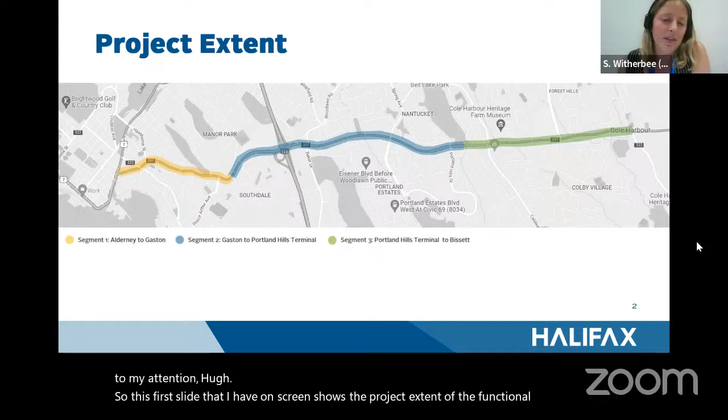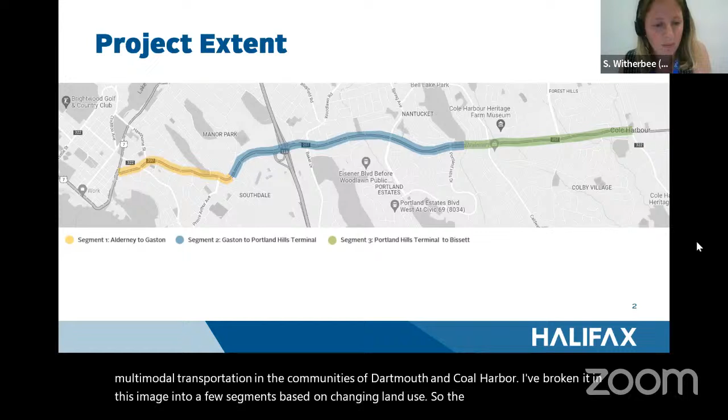This first slide shows the project extent of the functional planning project. The Portland Street corridor is 7 kilometers, spanning between Alderney and Prince Albert intersection all the way out to Bissett Road. It's a very long corridor, important for multimodal transportation in the communities of Dartmouth and Cole Harbour. I've broken it in this image into a few segments based on changing land use: segment 1 from Alderney to Gaston, the second from Gaston to Portland Hills Terminal, and the third from Portland Hills Terminal to Bissett.

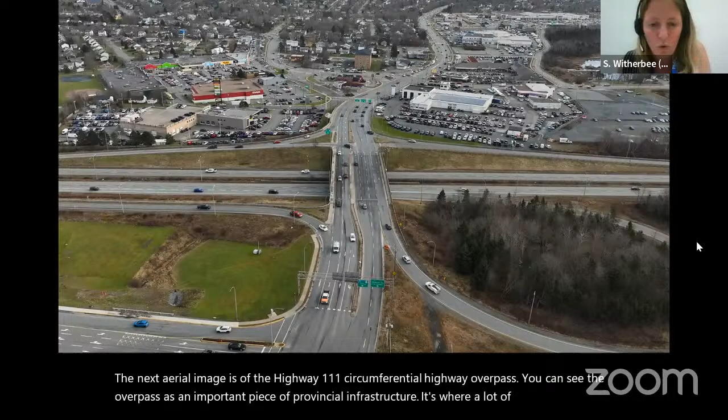The next aerial image is of the Highway 111, the circumferential highway overpass. You can see the overpass is an important piece of provincial infrastructure. It's where a lot of people who are moving along the corridor are using the corridor to access the highway.

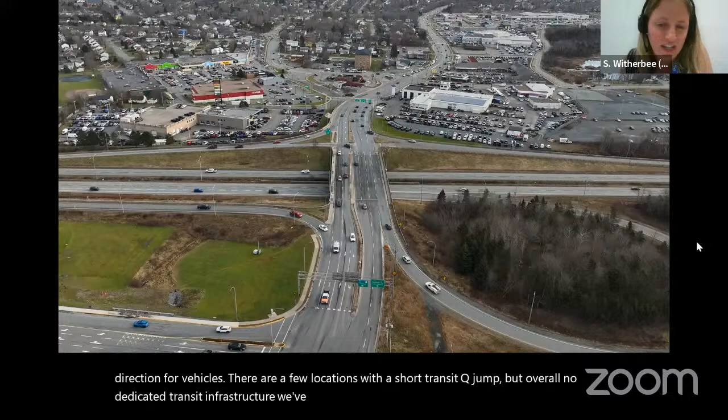You can also see a view of the next section of Portland Street, which is a little bit wider, so we get about 2 lanes in each direction for vehicles. There are a few locations with a short transit queue jump, but overall no dedicated transit infrastructure. We've got a very narrow sidewalk that crosses the Highway 111 overpass and no dedicated cycling facilities. This is seen as quite the barrier in terms of active transportation in linking between these 2 communities.

You can also see some of the surrounding land use, which is low density commercial parking lots, gas stations, car dealerships, and potential opportunity to grow and expand in the future.

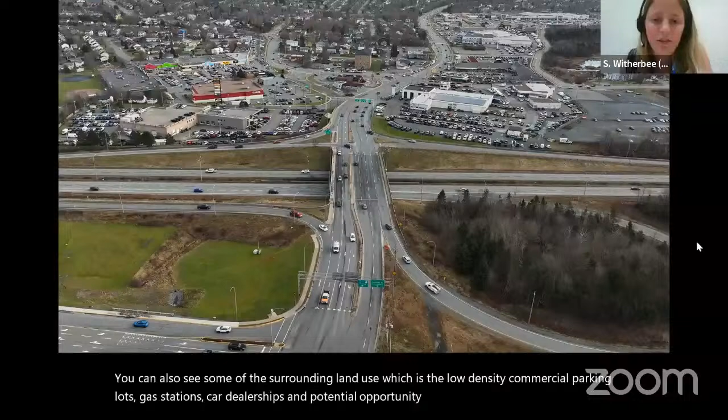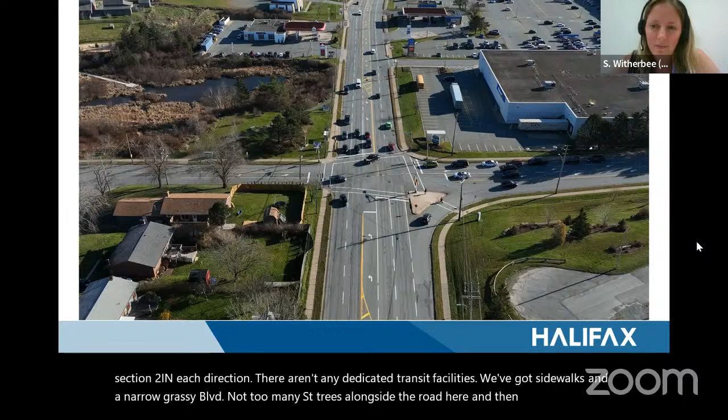I'll skip through this one to our last segment, which is Cole Harbour Road. It is a similar 4-lane cross section, 2 in each direction. There aren't any dedicated transit facilities. We've got sidewalks and a narrow grassy boulevard, not too many street trees alongside the road here, and then more of a village feel to the commercial alongside it. We still have the parking lots and lower density commercial fronting it, just on a bit of a less intensive scale.

The committee is probably quite familiar with some of our guiding policy that informs this functional planning project. So the integrated mobility plan is all about managing congestion through providing transportation options for people to get around using all sorts of different modes. There's also mode share targets set out in the IMP for moving away from our reliance on single occupancy vehicles towards more sustainable transportation modes.

Next we have the rapid transit strategy, which includes the bus rapid transit red line on Portland Street, spanning from Alderney out to Portland Hills Terminal. So this project will really look at how we achieve that bus rapid transit, a frequent, reliable all-day system to help move people more efficiently on transit.

We've got the AT priorities plan, which includes building a connected network of all age and abilities facilities for walking, rolling, and cycling. That's particularly within the regional center, but within these suburban areas, it's all about connecting people into this AAA network, and that is something we can look at for the Portland Street Cole Harbour Road corridor. There are some sections of the corridor included in the AT priorities plan as having cycling infrastructure to be determined, but not the entire corridor. But that's something we wanted to investigate through this project.

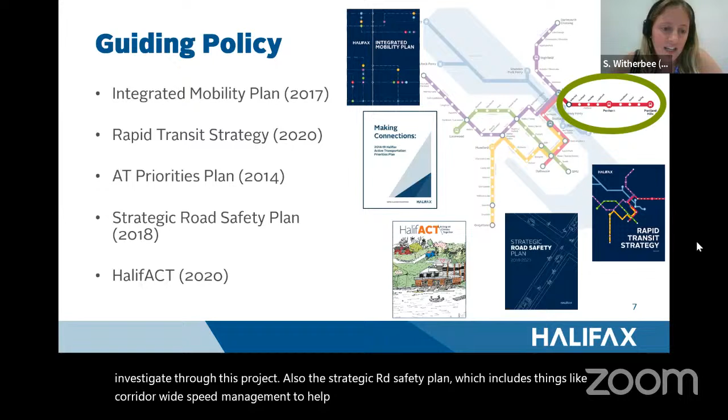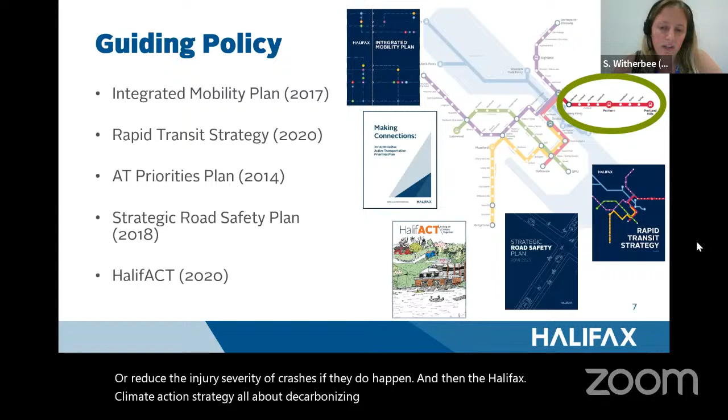Also, the strategic road safety plan, which includes things like corridor-wide speed management to help mitigate or reduce the injury severity of crashes if they do happen. And then the HalifACT climate action strategy, all about decarbonizing transportation and helping to meet our IMP mode share targets.

So some of the design objectives of this project: it's primarily to determine how best to implement BRT service along this corridor. We also want to enhance the pedestrian realm and incorporate connected cycling infrastructure as much as possible. Overall, it is about improving the people moving efficiency of how we best use the cross section and available space to help people get where they want to go and address our future mobility demands. So we're not just basing this off of how people move now, we're projecting into the future to make sure that it meets our needs moving forward.

As with most projects, we want to apply a complete streets lens to our decision making and help build up a mixed commercial and residential main street as a potential feature of this corridor, basing all of our recommendations on best practices for road safety and addressing areas of previous collisions.

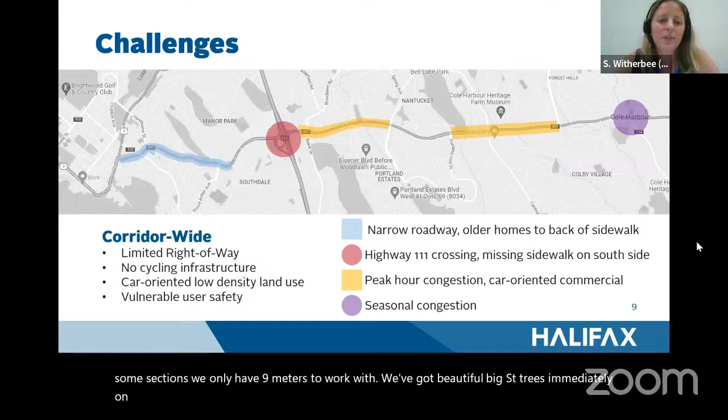Okay, yeah, certainly. So some of the challenges along the corridor, I've talked about limited right-of-way. In some sections we only have 9 meters to work with. We've got beautiful big street trees immediately on either side of the curb, so managing how we handle that in the section in blue on the left there, from Alderney to Gaston.

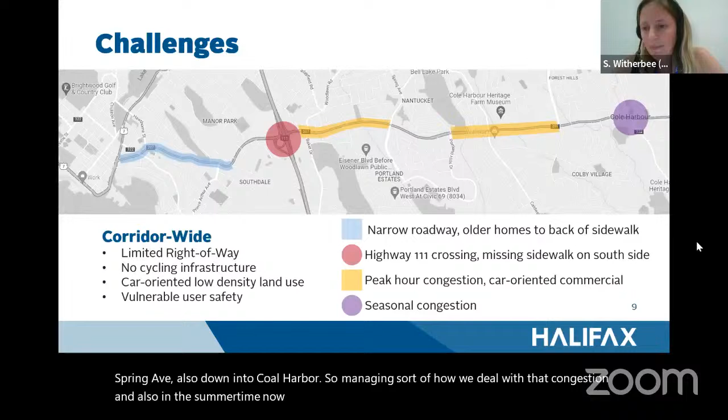I've highlighted in red the Highway 111 crossing, in that it is high volume and missing some pedestrian infrastructure. We've got peak hour congestion on Portland Street between Portland, Baker, Woodlawn and Spring Avenue, also down into Cole Harbour. So managing how we deal with that congestion, and also in the summertime now, folks coming and going from Rainbow Haven Beach at the Bissett Street intersection, there is some congestion with left-hand turns out there.

So we're wondering through this project, how can we best achieve transit priority? We're balancing building a smaller, livable street versus the peak hour convenience of fitting as many people through this corridor who need to move at AM and PM rush hours. That number grows significantly, so how do we best manage that?

Also looking at surrounding land uses, how do we get bus rapid transit supportive density alongside this project? And are there opportunities to incorporate cycling as well? Although it's not necessarily in the AT plan, we've heard through talking with people internally and externally that a continuous route along this corridor would be ideal.

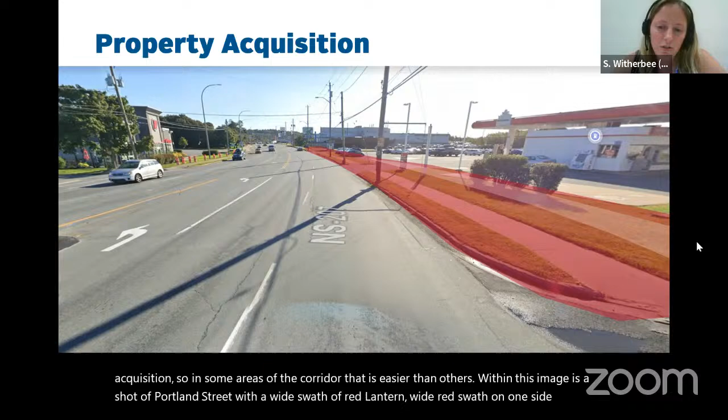Some of this conversation about adding additional infrastructure could require property acquisition, and in some areas of the corridor that is easier than others. This image is a shot of Portland Street with a wide red swath on one side, showing where we might need to acquire property through some of these proposed scenarios. In this section, it shows a portion of a parking lot that could potentially be acquired from adjacent properties. But in other sections of the corridor where it's narrower, we might have challenges acquiring property without impacting buildings.

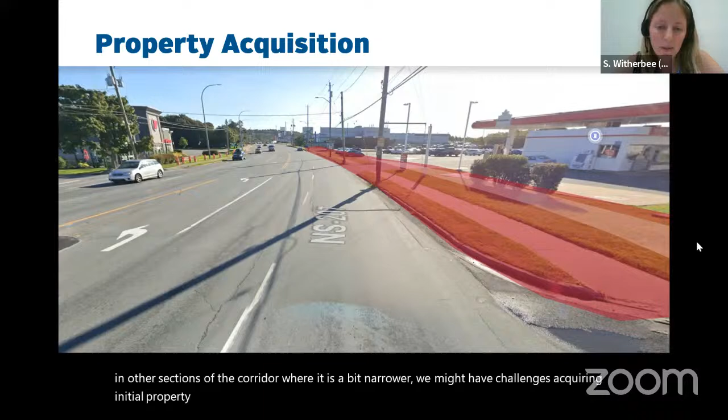So for the timeline, Hugh talked about how ATAC has discussed this project in the past. The Portland Street Cole Harbour Road Functional Planning Project was initiated in fall of 2020. There was existing conditions analysis and stakeholder engagement in spring of 2021 — that was the first ATAC conversation. A What We Heard report was produced, available online, and we started early concept work. The first round of public engagement included a virtual open house in 2021, since everything was virtual, along with an online survey.

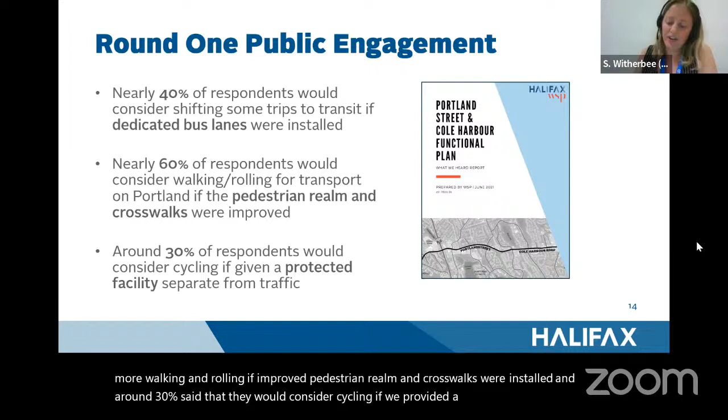It was really promising at that time — around 40% of participants said they would shift their trip if dedicated bus lanes were installed, or would consider changing their travel behavior. 60% of respondents said they'd consider shifting toward more walking and rolling if an improved pedestrian realm and crosswalks were installed. And around 30% said they would consider cycling if we provided a protected facility separated from traffic. So there's a lot of latent demand for these additional modes that hasn't been captured along a street so focused on vehicles right now.

So we took that, and the project sat idle for a few years due to changing staff priorities. But in the past year, they've hired me as project manager to oversee its completion. We reinitiated the contract with WSP and had to do additional data collection to see how things were functioning in our 2023 scenario, with hybrid work post — in quotations — COVID, basing all of our analysis and decision making on the latest and greatest data.

We did some concept work based on what we found, and then just in June last month we hosted phase 2 of our public and stakeholder engagement. We hosted two open house sessions and an online survey, engaging close to 1,200 people between all of those sessions — and we're adding more this evening, so thank you for your time.

Looking forward with this functional plan, we want to be sure we're planning for the future and making infrastructure decisions based on the HRM 1 million scenario. With all the significant growth the municipality has been seeing, if we continue on that trajectory, we could hit HRM 1 million in about 25 to 30 years. So when we looked at corridor moving capacity and design scenarios for Portland Street, we incorporated the demand that would be generated from this HRM 1 million scenario.

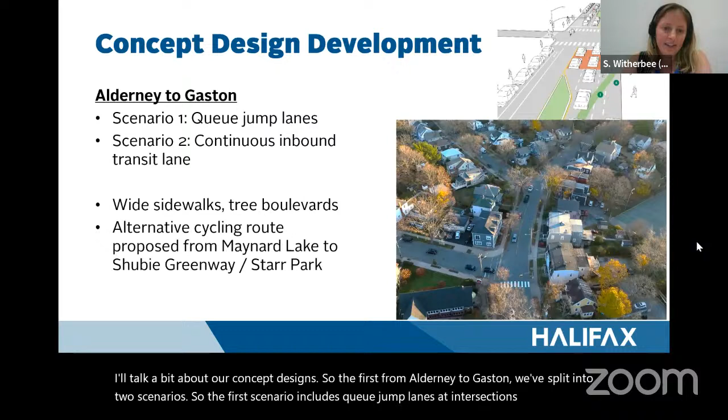I'll talk a bit about our concept design. So the first, from Alderney to Gaston, we've split it into 2 scenarios. The first scenario includes queue jump lanes at intersections only, and the second scenario includes a continuous inbound transit lane.

Both of these options include the opportunity to incorporate wider sidewalks and tree boulevards. Unfortunately, we were unable to find a way to fit both transit and enhanced cycling infrastructure through this very narrow section. So we do have an alternative cycling route proposed from Maynard Lake to Shubie Greenway / Starr Park, which I will show on a map in a moment.

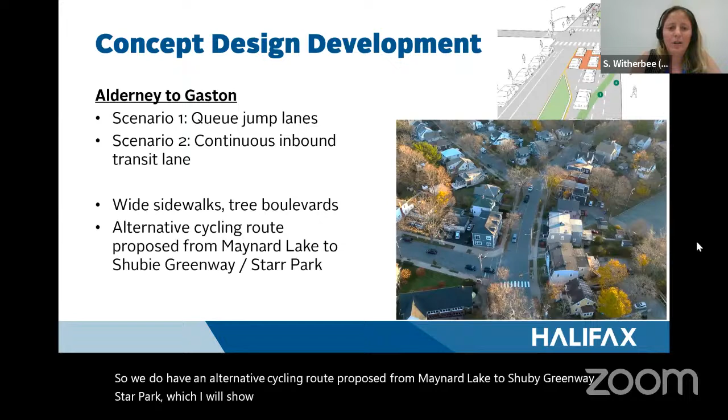So first is this scenario 1, the queue jump lanes. This is kind of a lower-impact solution that helps transit get through the intersections where most of the congestion occurs.

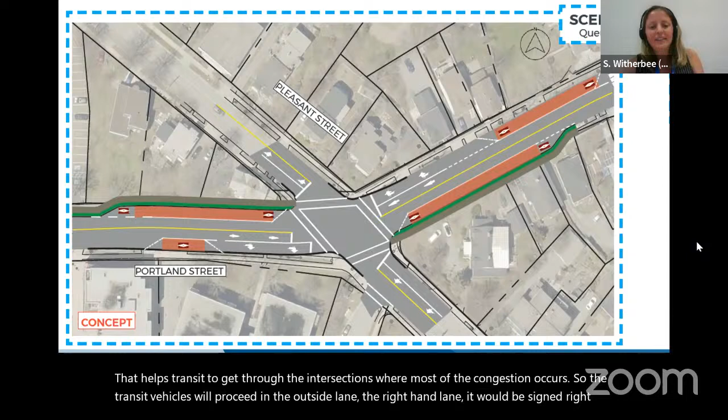So the transit vehicles would proceed in the outside lane, the right-hand lane. It would be signed 'right-hand turn except buses,' with a receiving lane on the far side of the intersection so that they could proceed on green alongside the through vehicles before merging back in with cars.

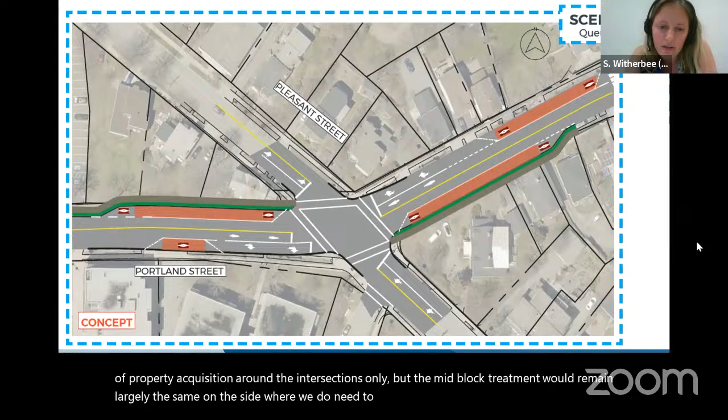This requires a small amount of property acquisition around the intersections only, but the mid-block treatment would remain largely the same. On the side where we need to widen for the queue jump, we would be shifting the sidewalk slightly with a grass boulevard and an opportunity to install probably a 1.8-meter sidewalk for accessibility, but it would bend out slightly in order to accommodate the queue jump lane.

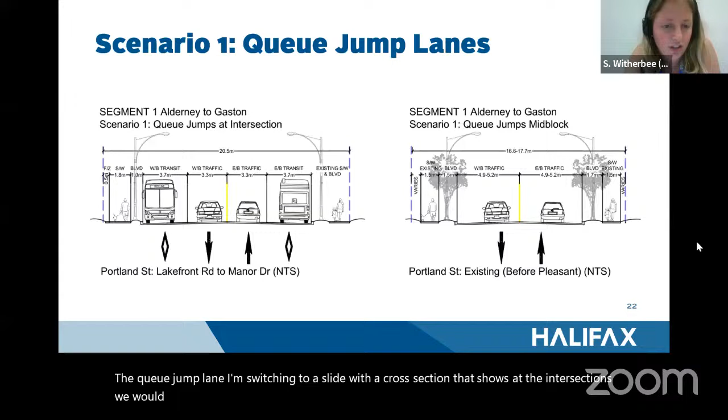I'm switching to a slide with the cross section that shows, at the intersections, we would have pedestrians crossing 4 lanes of traffic, and then the mid-block treatment on the right-hand side shows just the existing cross section with 2 wide vehicle lanes.

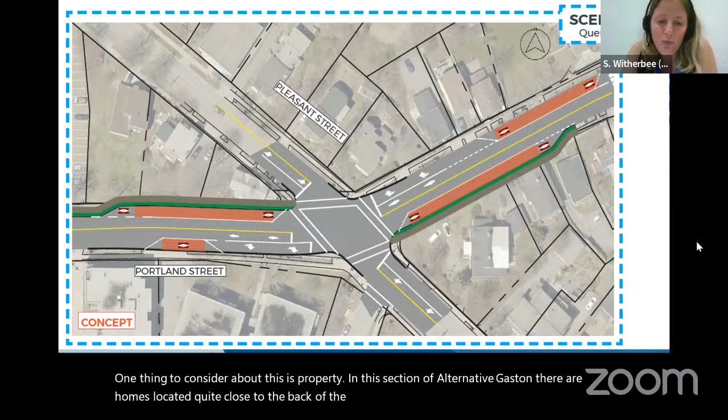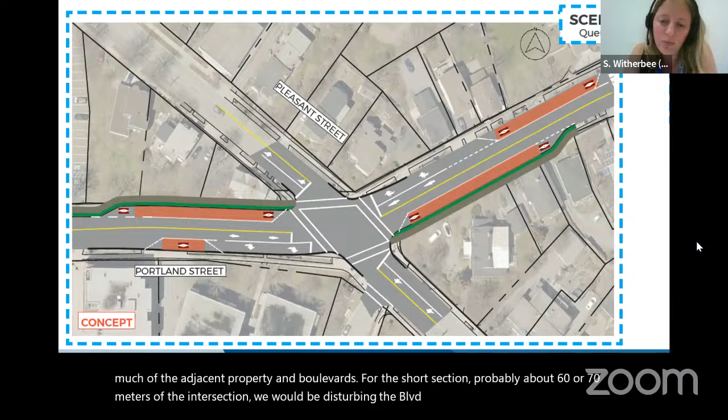One thing to consider about this is property. In this section of Alderney to Gaston, there are homes located quite close to the back of the sidewalk. So this queue jump option could be a way to help us balance that and achieve transit priority around the intersections without impacting as much of the adjacent property and boulevards. For the short section, probably about 60 or 70 meters at the intersection, we would be disturbing the boulevard and potentially acquiring a strip of property from the adjacent homeowners.

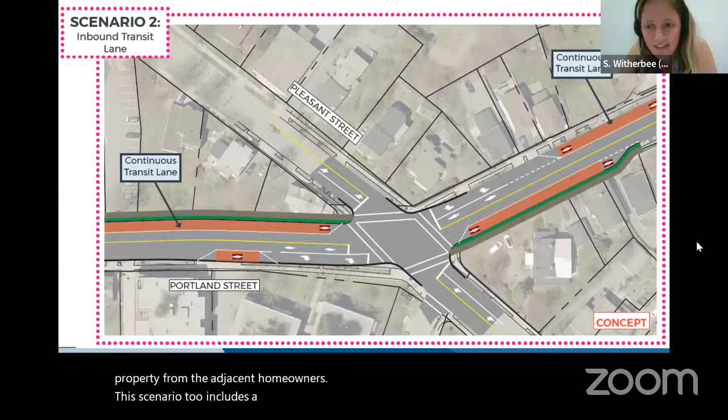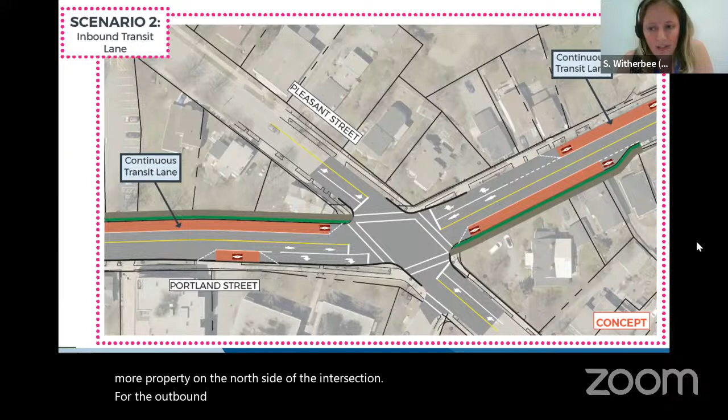This scenario 2 includes a continuous inbound transit lane. This was included in the rapid transit strategy as a way to help get people into downtown quickly and reliably. It takes it one step up in priority from the queue jump lanes, so inbound buses are traveling in a dedicated right of way, but the impact is that it requires more property on the north side of the intersection. For the outbound direction, we would maintain queue jump lanes at intersections, and then buses would proceed in mixed traffic, a single lane for the remainder of the corridor.

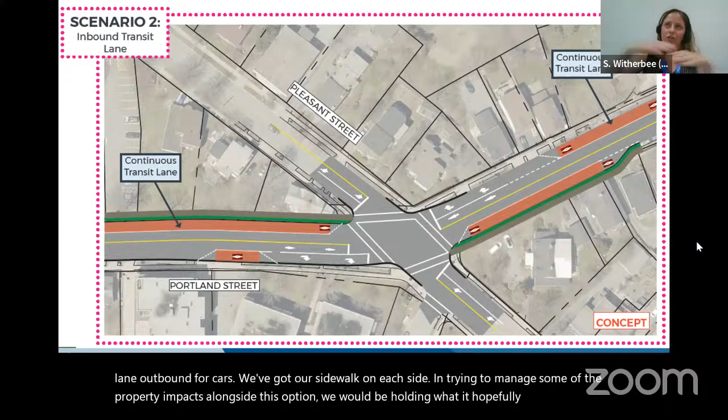In trying to manage some of the property impacts alongside this option, we would be holding what is hopefully the south side curb and trying not to touch any of that side, and we would be widening on the north only so that we can try and manage some of those impacts.

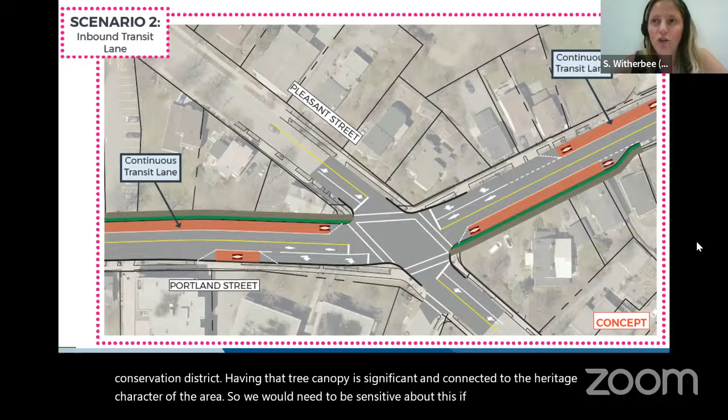Street trees have been noted as being significant to the area, especially where there is a proposed heritage conservation district. Having that tree canopy is significant and connected to the heritage character of the area. So we would need to be sensitive about this if we are touching that north side curb only. Unfortunately, the trees alongside that north side would need to be removed. We would be shifting the sidewalk slightly to the north, reestablishing a new tree boulevard and planting new trees, which would have an opportunity to grow and thrive, but it would take a few years for the trees to get back to that same feeling of the 100-year-old beautiful canopy that we have today. So that's playing the long game a little bit.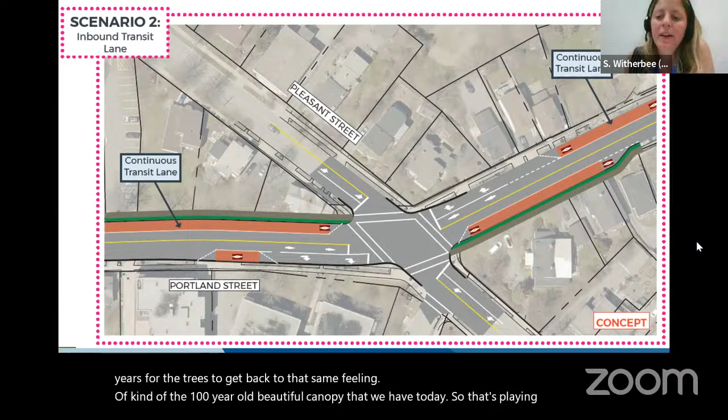This option also impacts a significant amount of properties along that north side.

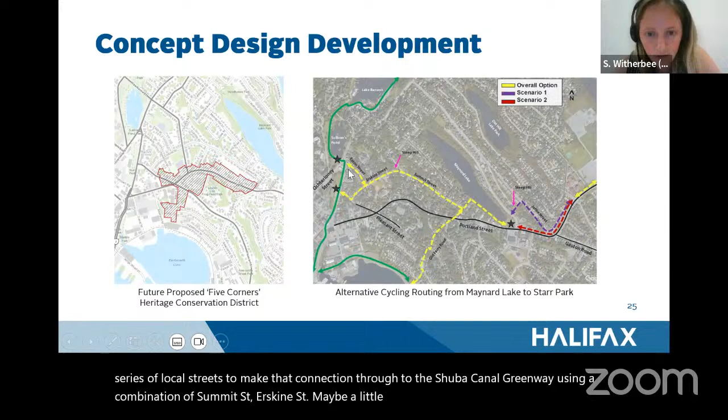On the right-hand side of the screen here, this is where we show the alternative cycling route. Where this project succeeds in providing 6 kilometers of protected, separated cycling route between Lakefront Road and Bissett Road, due to the narrowness of the Portland Street intersection, we've proposed an alternative route that puts the bikes through Maynard Lake Park, formalizes an existing footpath along the edge of the lake, and then bends in to use a series of local streets to make that connection through to the Shubenacadie Canal Greenway, using a combination of Summit Street, Erskine Street, maybe a little bit of Pleasant Street, maybe a little bit of Eden Street, to make that connection over to the Shubenacadie Canal Greenway, or an alternative route using Old Ferry Road down to meet the Dartmouth Harbourfront Greenway. So it could join in a few different ways.

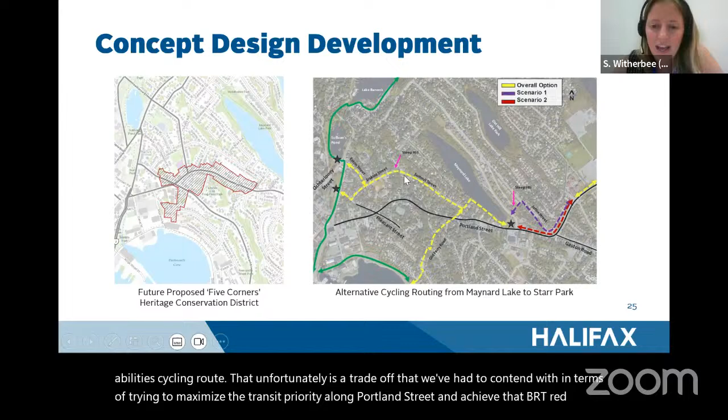One thing we acknowledge is that there is a very steep block of Erskine Street right before it hits Hawthorne that could pose a challenge for accessibility in terms of calling it an all ages and abilities cycling route. That unfortunately is a trade-off we've had to contend with in trying to maximize transit priority along Portland Street and achieve that BRT red line. It works okay for the inbound, westbound direction—you can roll down the hill—but for folks coming back to Dartmouth and Cole Harbour Road, proceeding eastbound, there is one block of very steep hill.

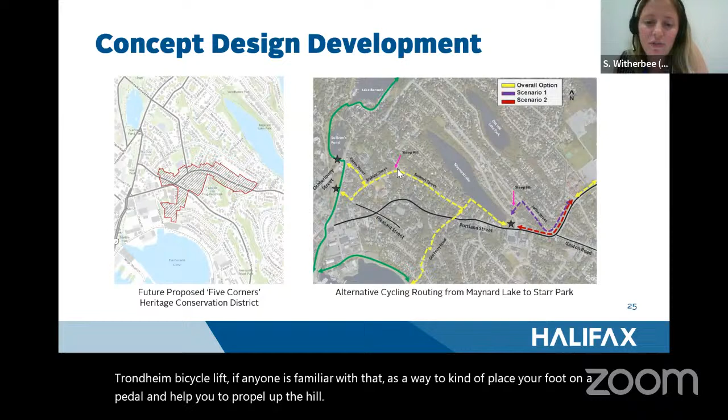On an e-bike, you are able to get up. If you are super fit on an acoustic bike, you're probably able to get up too, but I would say the largest amount of people would probably choose to dismount, if they are able, and walk their bike up that particular block of Erskine. One thing proposed to help manage that steepness issue is the Trondheim bicycle lift, if anyone is familiar with that—a way to place your foot on a pedal and help you propel up the hill—as something that could be considered potentially in the future to overcome that. The routes shown on screen would be subject to further analysis through functional planning at a later stage.

From Lakefront all the way down, this is Prince Arthur Avenue, we're able to achieve a protected, separated cycling facility in addition to wide sidewalks and protected bike lanes.

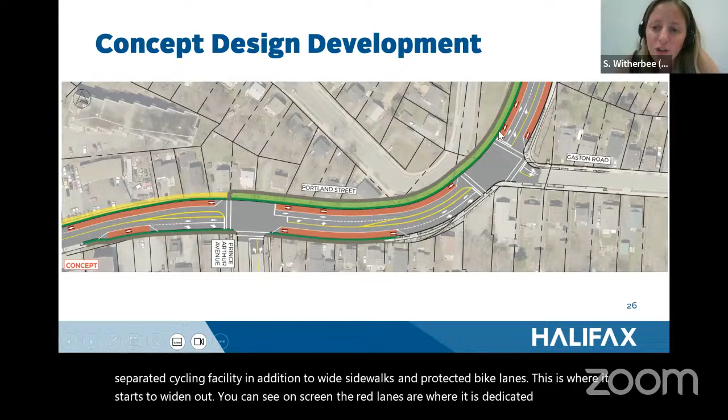This is where it starts to widen out. You can see on screen the red lanes are dedicated for transit, so we get an inbound and an outbound dedicated transit lane. We have the light green, which is a protected bikeway.

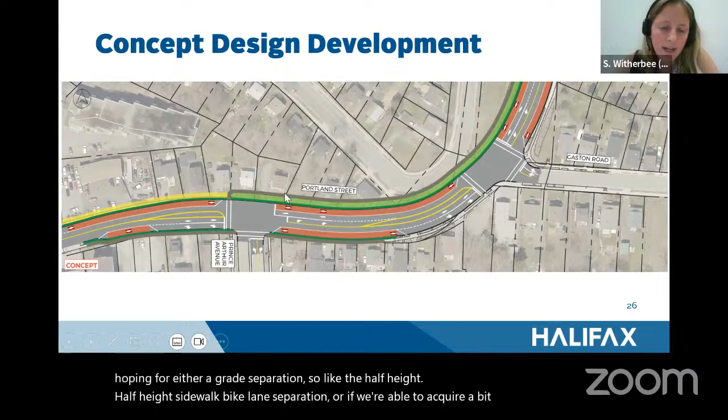At this point, it would be concentrated to be a bidirectional bikeway on the north side of Portland Street alongside a sidewalk. We are hoping for either a grade separation, like a half-height sidewalk bike lane separation, or if we're able to acquire more property, we could put a grassy buffer in between. This continues all the way out to the next section, from Gaston to Eisner.

So with scenario 1, we show the Highway 111 overpass with signals and some restriping around the Portland Baker Woodlawn intersection. Scenario 2 shows an overpass with a new treatment, which is a roundabout at Woodlawn and Aythorpe.

As part of this scenario, a major component is a separated active transportation bridge over Highway 111, which I will show you in this next section. Here is a map of what that concept scenario could look like.

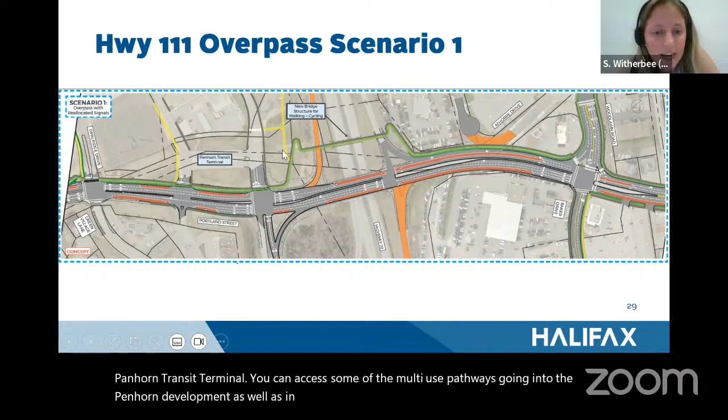So pedestrians and bicycles, for the most part, are still concentrated on the north side as it goes by Penhorn. You can access Penhorn Transit Terminal, and some of the multi-use pathways going into the Penhorn development, as well as behind Penhorn Lake. Then there are a few switchbacks to help get a grade structure over top of Highway 111 on the way down.

Then from Portland Baker Woodlawn, it would transition into a unidirectional facility with bikes proceeding one direction on each side of the intersection. Notably, this links up with the Dartmouth East project, which includes connectivity and protected facilities on Woodlawn, going up into that neighborhood, Valleyfield, and beyond.

So we'll be hooking into that, as well as incorporating a new multi-use pathway on the east side of Baker Drive to connect down into the Russell Lake Trails system.

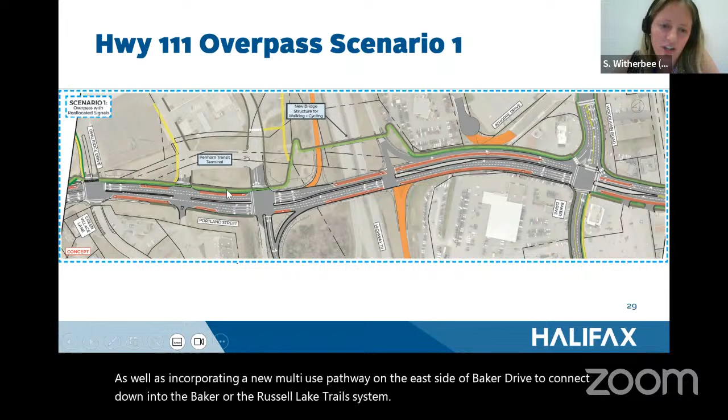So the active transportation treatment doesn't shift as much between these two scenarios. There are some changes included on the Highway 111 overpass in terms of vehicle lanes and transit. We can get into those if people have questions at the end, but I'm going to focus on active transportation for the purposes of this committee.

Here's the second view. Similarly, the bikes and peds are on the north side. We would have some short sections of sidewalk on the south side as that side develops, and crosswalks to help people get across and access the Penhorn terminal.

There wouldn't be a facility on the south side of the overpass until you get to the Portland Baker Woodlawn intersection, in which case the south side sidewalk would pick up and continue. You can see in this image...

Once you get over the overpass, you're still on the north-hand side, but with this Woodlawn Athorpe roundabout, the route would take you a little bit farther north, and then you would need to cross two legs of the roundabout before hooking back down a multi-use pathway on the east side of Woodlawn to get back to the primary travel corridor. So there is a bit of a diversion to make that change.

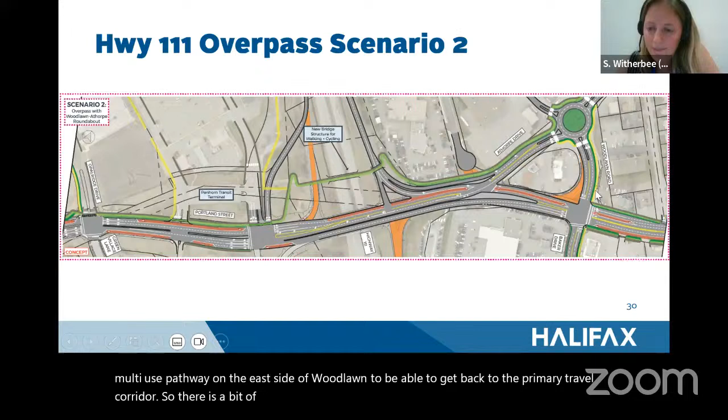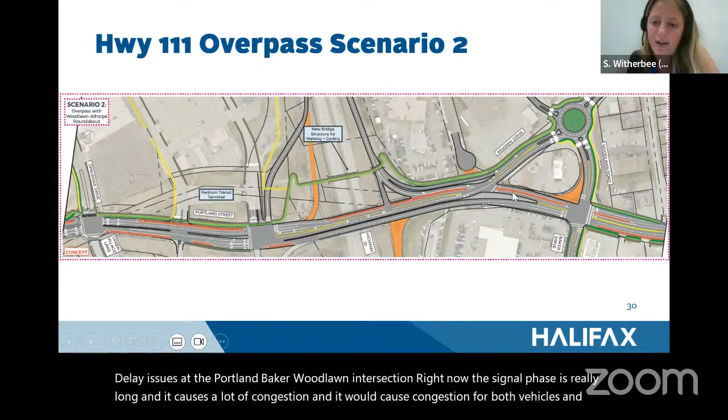This scenario was proposed to try to mitigate delay issues at the Portland Baker Woodlawn intersection. Right now, the signal phase is really long and it causes a lot of congestion for both vehicles and transit. So this is meant to try and take away the left-hand turns and allow for more green time on the transit corridor for Portland Street.

We performed an evaluation about how each of these scenarios perform for the various modes. I won't get into it in depth, you can refer to this information online, but you can see that scenario 1 performs better for people walking, rolling, and cycling, given a light green, better score, versus scenario 2, given a yellow, good score. That's based on the crossings required for the Woodlawn Athorpe roundabout and the additional travel distance.

The next section is from Eisener to Portland Hills Terminal. This is the big meat of it, our philosophical discussion about how we best provide transit priority along here. We have scenario 1, reallocating our existing right-of-way, working within the existing cross section, and marking the existing curb lanes dedicated for transit only.

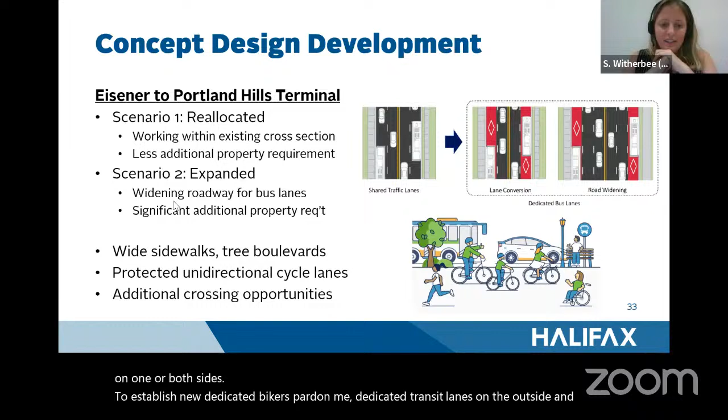Our scenario 2 would be expanding the right-of-way. We would need to buy additional property on one or both sides to establish new dedicated transit lanes on the outside, and maintain 2 through vehicle lanes for cars.

Where we are making changes to the right-of-way, we would have opportunities to provide wide tree boulevards, wide accessible sidewalks, protected unidirectional facilities on each side, and look for opportunities for additional pedestrian crossings to improve how people can walk and roll around their community and break up some of those larger block sizes.

This is an image of scenario 1, what it would look like if we reallocated the existing right-of-way. There's only 1 lane for vehicles in each direction. We maintain the center 2-way turn lane, reversing turn lane that exists there today, and work with the existing signalized intersections. We would hook into proposed facilities on Eisener.

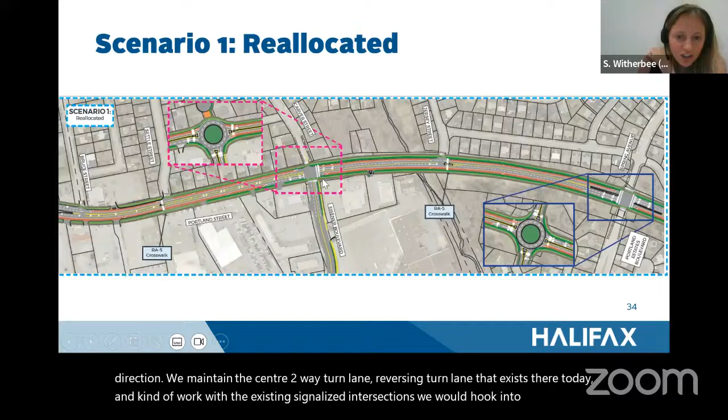We've shown a potential future multi-use pathway on the east side of the street. That would be subject to future study, but we want to acknowledge that it would all connect in.

As a sub-option of scenario 1, we've also looked at what would happen if we added 2-lane roundabouts at each of the signalized intersections. Some of the inspiration we drew from for that would be the roundabouts provided on North Park Street in Halifax, at Cunard and at Cogswell. Those seem to function fairly well and were supported by the community.

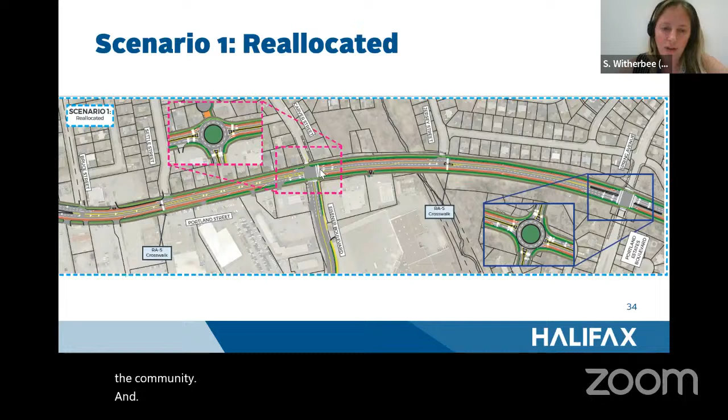Looking at roundabouts was a potential way to help move cars and buses faster without necessarily needing to stop and wait for the green time at the signalized intersection. However, we wanted to contrast what that looks like, keeping the signals versus roundabouts. There are trade-offs associated with the roundabout in terms of crossing priority. The sidewalk and the unidirectional bikeway would have to bend out a little bit farther and cross the leg of the roundabout in 2 stages.

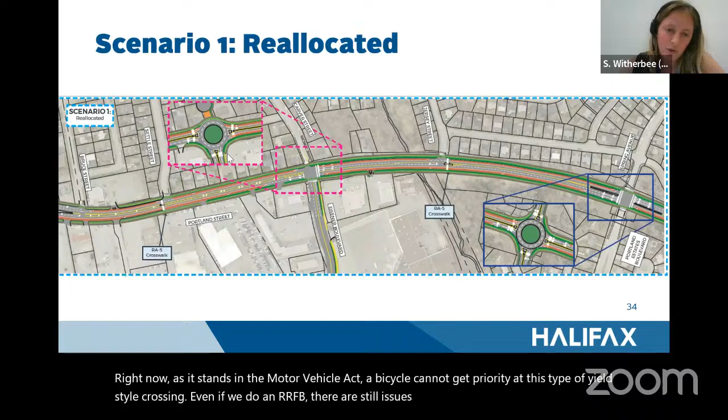Right now, as it stands in the Motor Vehicle Act, a bicycle cannot get priority at this type of yield-style crossing, even if we do an RRFB. There are still issues with what the right-of-way could look like if there were to be a collision. With a future lens that could be adjusted, and maybe we will have that fixed or written within the MVA by the time this is built or shortly after, or it's possible that might not be included while we want to build these.

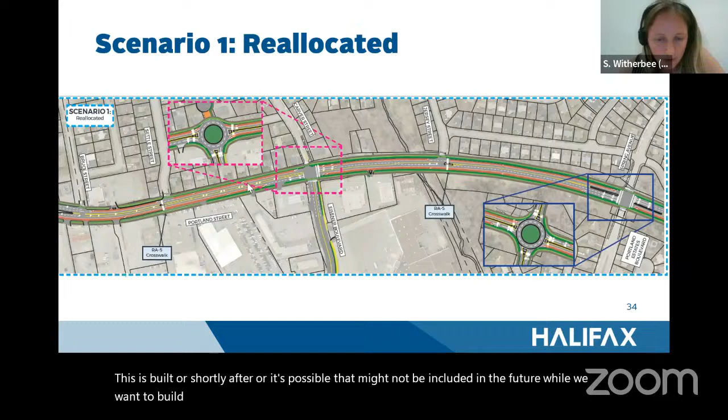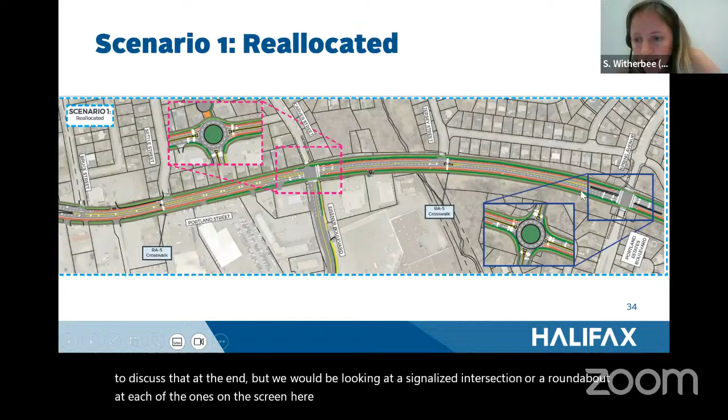So contrasting what it looks like with a signalized intersection, how it feels for people walking and rolling as they cross. Also from an accessibility perspective, I'll be curious to discuss that at the end, but we would be looking at a signalized intersection or a roundabout at each of the ones on the screen here, so Eisener and Carver, and the intersection of Spring and Portland Estates.

We've also shown some RA5 crosswalks. We could also consider half signals at these locations, like the one that exists right now at Jersey Street. We'd be installing an island, a traffic island or refuge island, so that folks could cross in 2 stages and have a bit of a safety piece.

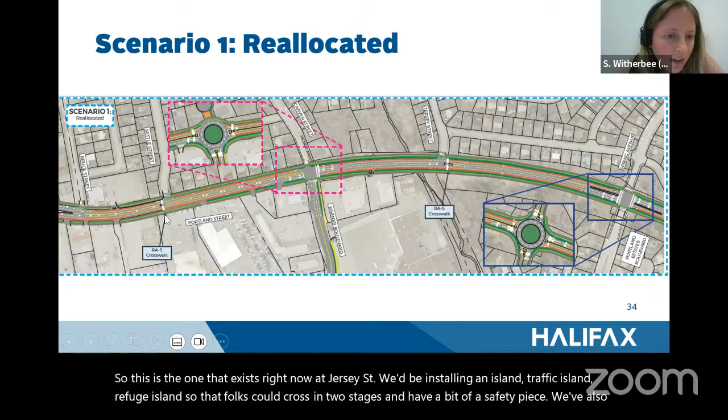We've also shown one at Settle, and we could introduce more along the corridor as a grid network is built out into the adjacent neighborhoods.

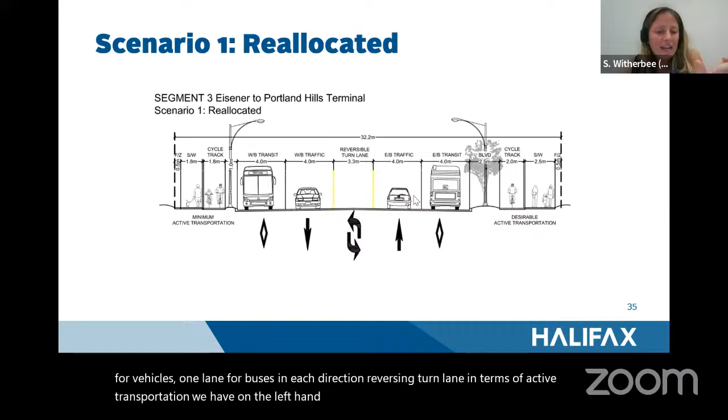Here is a cross section of what that scenario 1 reallocated could look like. There's 1 lane for vehicles, 1 lane for buses in each direction, and a reversing turn lane. In terms of active transportation, on the left-hand side we have our minimum AT dimensions, for where it's very constrained.

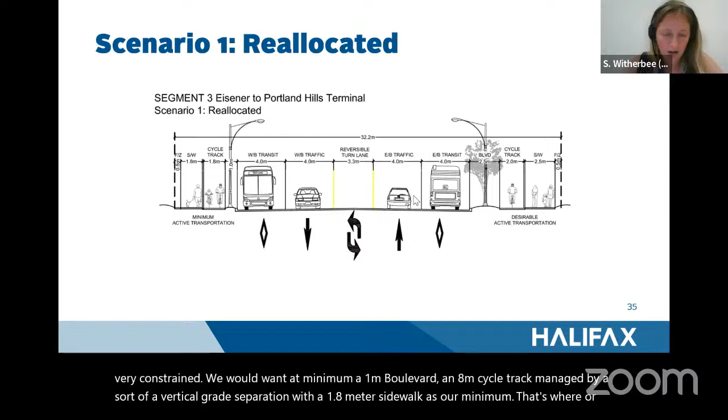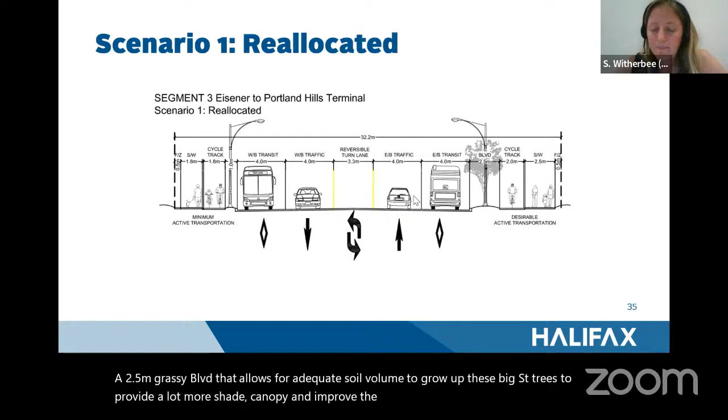We would want at minimum a 1 meter boulevard, a 1.8 meter cycle track, managed by vertical grade separation, with a 1.8 meter sidewalk as our minimum. That's if we don't want to acquire additional property through a pinch point. The ideal we're shooting for is to provide a 2.5 meter grassy boulevard that allows for adequate soil volume to grow big street trees, providing more shade canopy and improving comfort of the walking and cycling facilities adjacent to it. We would aim for a 2 meter cycle track and a 2.5 meter sidewalk wherever possible.

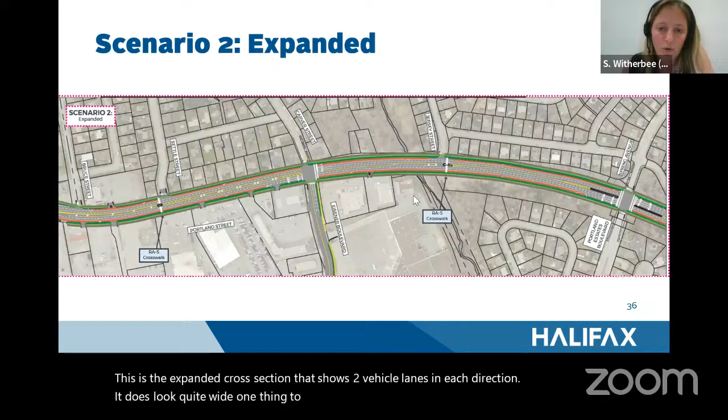So I've just flashed to the cross section. You can see a curbside transit lane, 2 vehicle lanes in each direction, a center reversible turning lane, and on the flip side. So it would be expanding the right-of-way significantly, which for walking and cycling could have implications

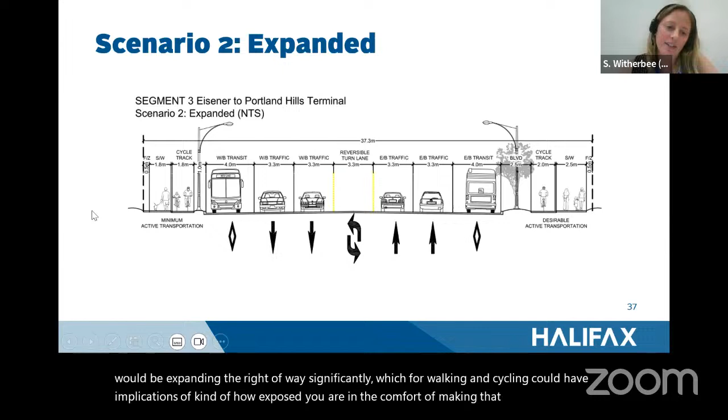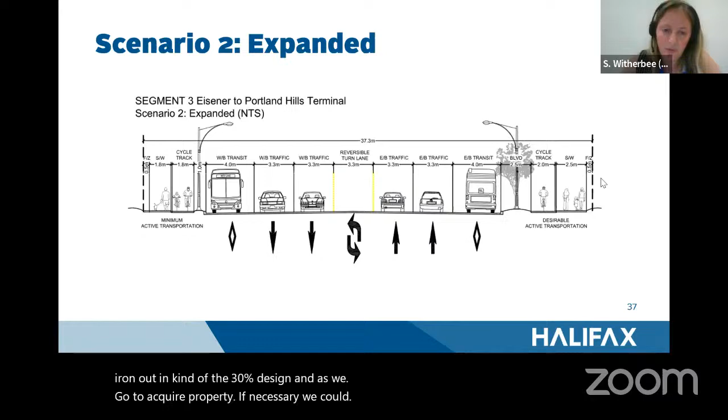of how exposed you are and the comfort of making that crossing. Again, this cross-section shows the minimum AT and the desirable. That's something that we would need to iron out in the 30% design, and as we go to acquire property, if necessary, we could see what is possible for these facilities on either side.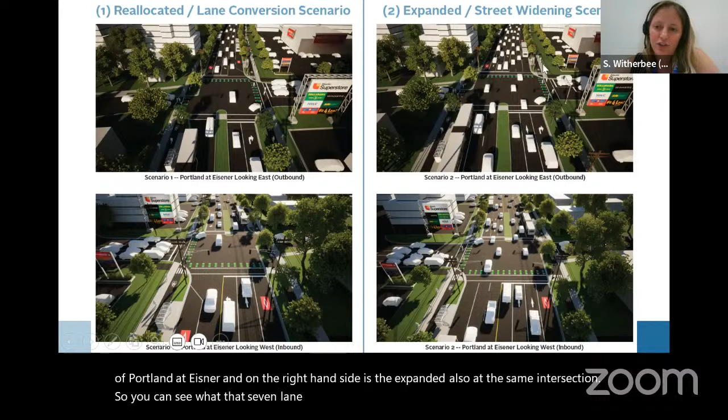So you can see what that 7-lane crossing, if you could see my cursor here, could feel like as a pedestrian on that western leg. There are some opportunities to provide refuge islands to cut that up, but on the whole, you are crossing longer.

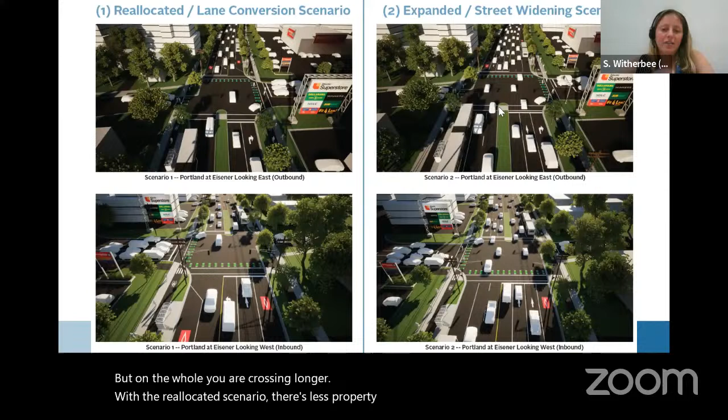With the reallocated scenario, there's less property acquisition requirements. It's a little bit faster for us to build. The expanded cross section does require getting a strip of property on one or both sides, so that could have implications for how quickly we're able to install these transit lanes.

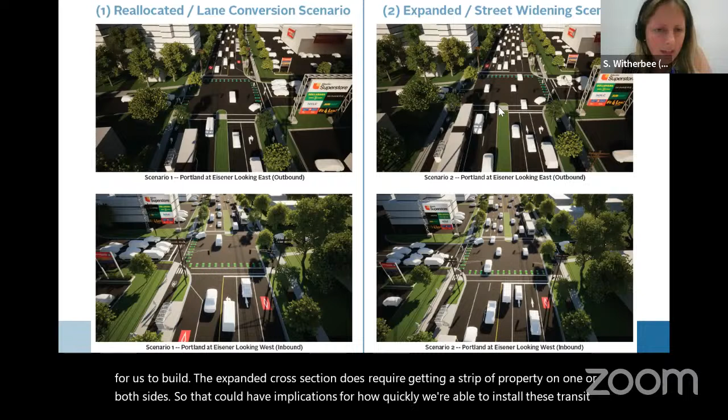And also associated with that is cost. So not only would we need to build additional infrastructure, we would need to pay money to acquire this additional property for what could be a few meters of additional land for 2 kilometers of the stretch to be able to add these transit lanes.

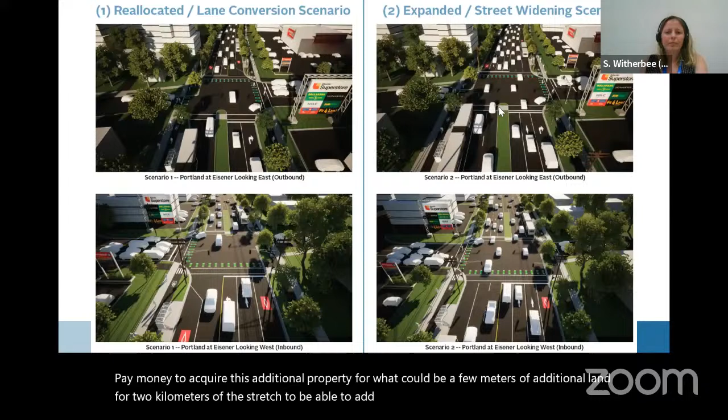So here's a quick evaluation. You can reference all of this information online, but really what we found was that the roundabouts weren't quite as good for walking and cycling. The scenario 1 reallocated, where it's the narrower cross section, seemed to function the best for walking, rolling, and cycling. And we can dig into that more.

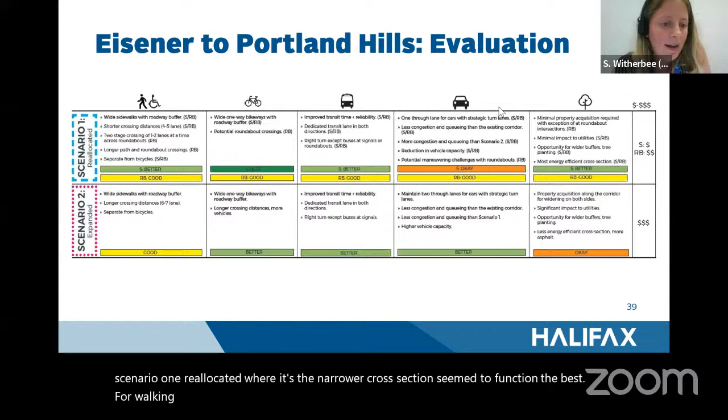But I'll continue on to this next section, which is Portland Hills Terminal to Bissett. Where there aren't bus rapid transit lanes proposed east of Portland Hills Terminal, we were working within the existing 4-lane cross section and just looking at treatments at intersections to see how that impacted comfort and safety. Also making sure that we're expanding and extending our protected unidirectional bike lanes along this section.

We're doing this rather than narrowing it down, as one of the scenarios, in order to potentially future-proof if the Cole Harbour community does build up in the future and we decide that the BRT Red Line should be expanded, we'll have the right-of-way available to make that decision in the future. But yeah, looking at wide sidewalks, tree boulevards, and unidirectional bike lanes.

So scenario 1 includes mixed traffic with roundabouts, again trying to mimic the North Park 2-lane roundabouts as much as possible, but the pedestrian and cycling path diverts around to do the two-stage crossing at each leg of the roundabout, at more of a yield style. There's a possibility for us to install RRFBs, rectangular rapid flashing beacons, to help draw attention to the fact that someone's trying to cross there, building comfort as well, but it would still be a roundabout style crossing.

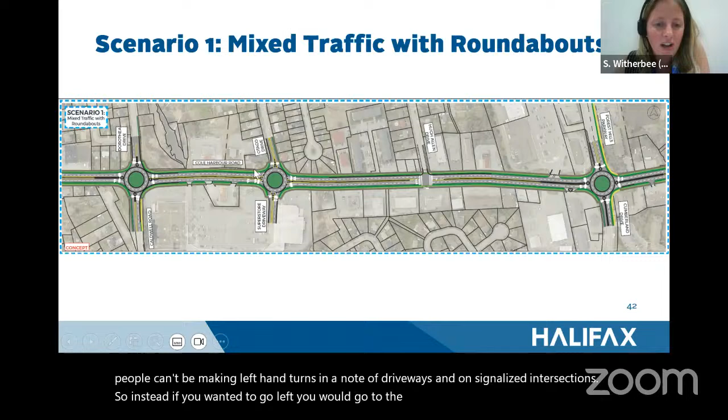That helps with access control and safety, so people can't make left-hand turns in and out of driveways and unsignalized intersections. Instead, if you wanted to go left, you would go to the roundabout, go all the way around and make your right-hand turn in. There are some implications for travel distance, but safety overall would improve, and we're able to remove that center left turn lane because the roundabout facilitates U-turns.

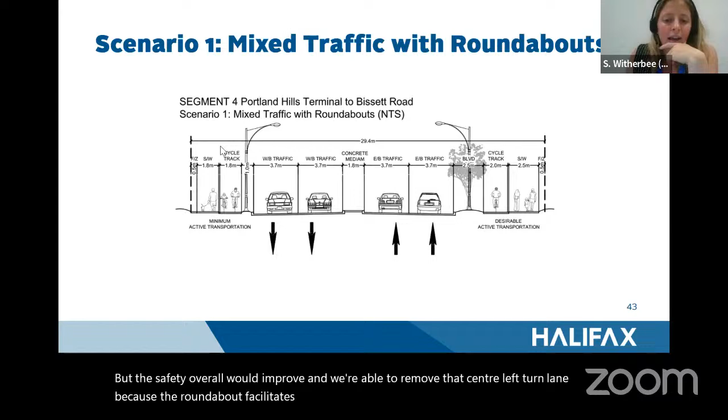Scenario 2, mixed traffic with signals, is very similar to what's out there today, but with the addition of protected unidirectional bike lanes. We would be taking where the sidewalk is now, shifting it out further, and putting the bike lane in between the boulevard and the place for people walking and rolling. That is what it could look like.

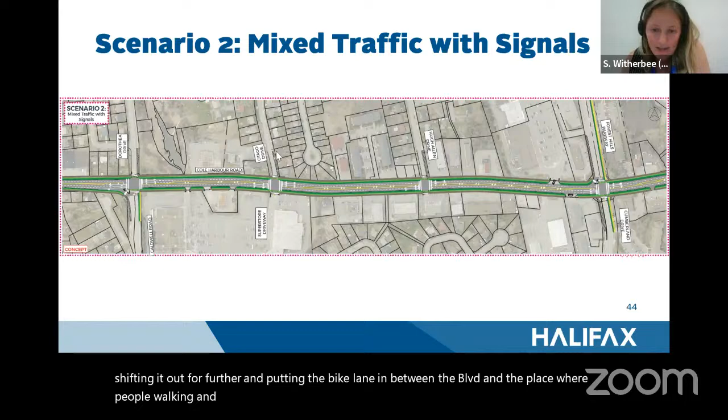Overall, we really wanted to frame these as full-length scenarios. Scenario 1 is meant to be the most nimble, cost-effective, quickest to do. It benefits people walking and rolling by providing wide sidewalks, additional boulevards, improved pedestrian streetscape, and keeping it narrow.

Scenario 2 is more costly and could take additional time to build. It requires significant additional infrastructure and acquiring a wide swath of property to achieve that, and that takes time. In terms of people cycling, it is comparable.

Both achieve the 6 kilometers of protected cycling lane. But with pedestrians, for scenario 2 that is widened, we're increasing the crossing distance to 7 lanes instead of 4 or 5 lanes, which has implications for safety and comfort.

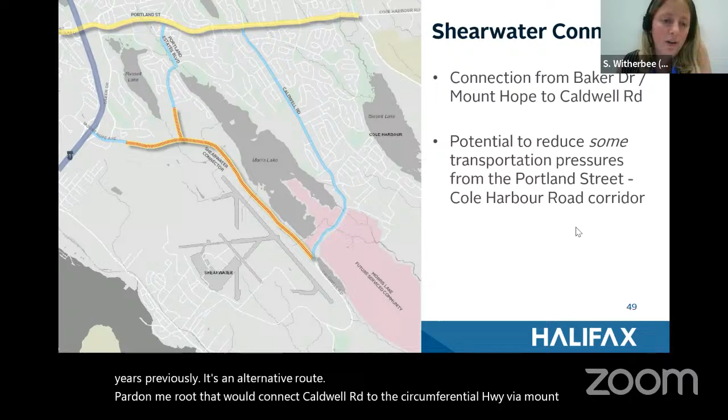Another thing I want to draw to the attention of the committee is the Shearwater Connector. It's something that's been talked about for a few years previously. It's an alternative route that would connect Caldwell Road to the Circumferential Highway via Mount Hope Avenue, with another small arm up to Portland Estates Boulevard. There's a potential, if this road is built in the future, for it to relieve some traffic pressure from Portland Street and serve as an alternative corridor for cars.

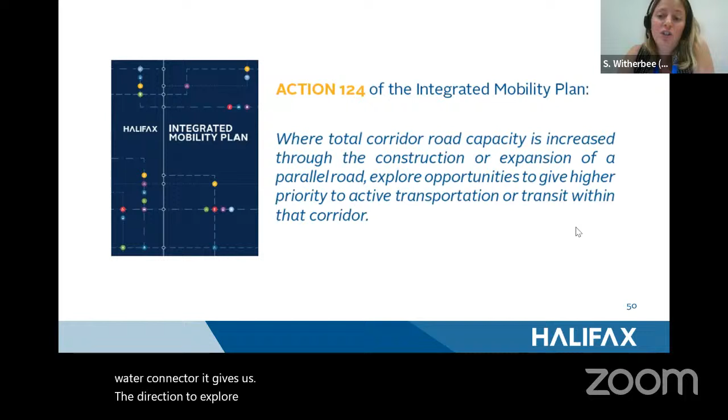If we look at Action 124 of the Integrated Mobility Plan, it says where total corridor capacity is increased through the construction of a parallel road, like the Shearwater Connector, it gives us direction to explore opportunities to give higher priority to active transportation and transit within that primary corridor. So if we build the Shearwater Connector, maybe that could serve as fuel for us to look at a narrower, more transit and AT focused cross section for Portland Street and Cole Harbour Road.

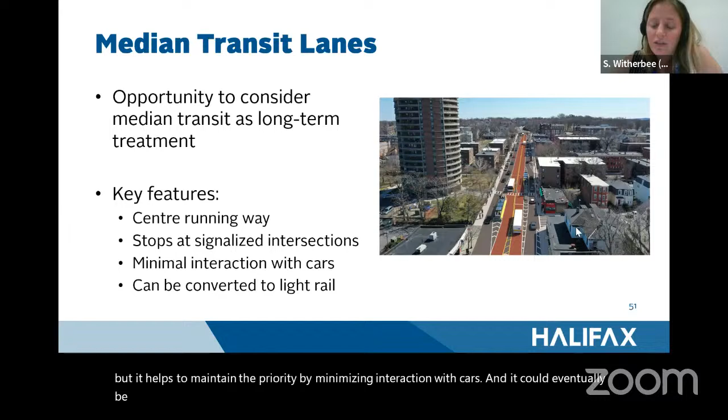The stops would be staggered on each side of the intersection to allow space for a left-hand turn lane in the opposing direction. But the property requirements for this are comparable, if not slightly less, than the expanded scenario.

So if we go to acquire additional property, should we be looking at just doing these median transit lanes in the first place? Median transit is better for reliability, transit time, and priority. It enhances safety with fewer turning conflicts with traffic. If you are walking across the street, you will cross in a few different locations - there's multiple short crossings in order to get to those median transit islands. So that could be a pro or a con.

The curbside transit is easy and quick to implement. There's less property requirements, but there are longer crossing distances, and you're mixing with right-hand turning cars. So in the scenarios that I showed you, all of the curbside transit is a right-hand turn except for buses, which does reduce the priority a little bit.

So one thing that we could consider with this is whether we go right to building median transit lanes, or if we choose one of these alternatives of curbside as an interim while we prepare ourselves for that longer term vision of median transit.

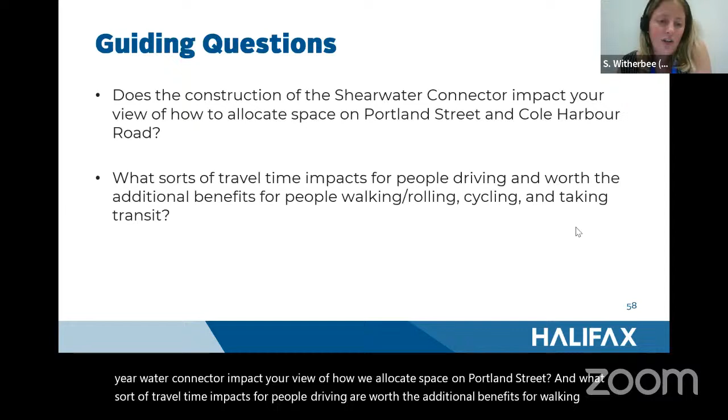Just before we go to questions and comments from the committee, because I imagine some committee members may have quite a few comments and questions, will they be able to contact you directly, or is there a link that they can go to for their comments?

We have all of the engagement material online at that Shape Your City Halifax link, but the survey has closed already, so that wouldn't be available for feedback anymore. If you have specific thoughts or you'd like to provide input beyond what we discuss in the session today, you can feel free to reach out to me by email. I can also put my phone number, or if you want to arrange a quick conversation, I can make myself available to do so. And we'll be sure that the feedback that we hear tonight is reflected in the What We Heard report as well.